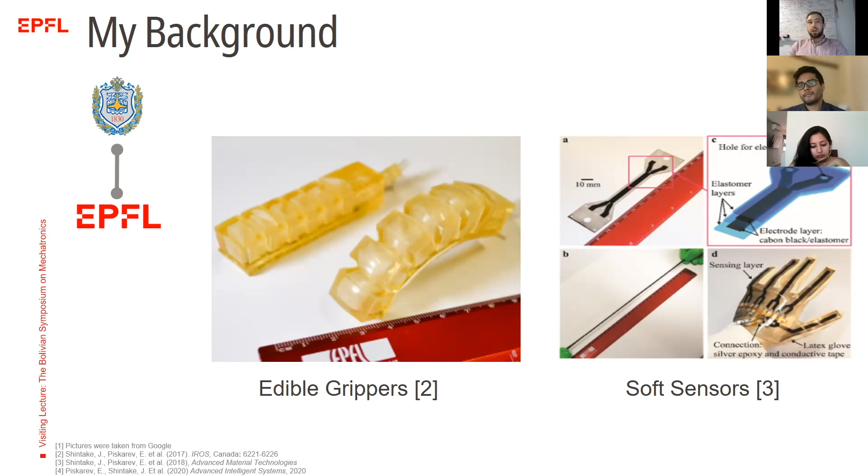Then I finished my 4 semesters at EPFL, and as a final part I went to the US, to NC State, located in North Carolina, in the city called Raleigh. Raleigh is the capital of North Carolina - probably people are more familiar with the other city called Charlotte because it's just larger. Also, if you guys are keeping track of the NBA, the Charlotte Hornets are from that city. However, in Raleigh we also have an NHL team, the Carolina Hurricanes, that performed not too bad the last 2 seasons. It's also a beautiful, magnificent city.

That's actually how the campus there looks. We've got an unbelievably great library there too - it looks super fancy, super nice, calm, a large campus. There at NC State, I was working with Michael Dickey in the Department of Chemical and Biomolecular Engineering. That seems, at least from the name, absolutely far from robotics and from my background in mobile robotics and mechanical engineering. However, guys, I'd tell you it's not that far, actually. Michael is just a brilliant scientist - he's been identified as one of the most influential researchers in the world this year.

That means he's in the top 0.1% in research fields right now, in 2021. Talented, but what's more important is that he's an extremely nice person to communicate with, to work with, to spend time with. There I've been working on variable stiffness actuators using liquid metal. Why liquid metal? That's of course because of the focus of the Dickey group - Michael works a lot with liquid metals. His ultimate goal is, if you saw Terminator 2, there was a robot named T-1000, made out of liquid metal, and that's something Michael would like to build in the end of his path. Of course we're probably a little bit far from that right now, but that's a great ultimate goal, I'd say.

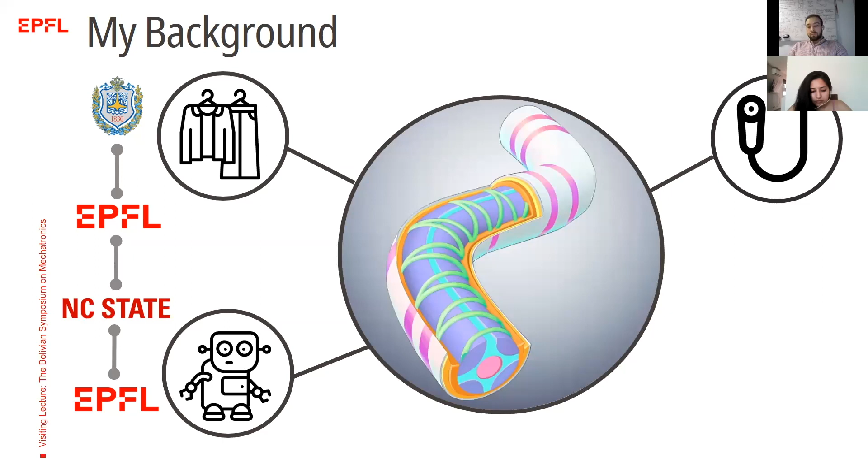It potentially can actuate, changing its state from rigid to soft and soft to rigid, and then could be woven into clothes, used with different robots, or also in medical purposes. That's kind of my ultimate goal. Ideally, I would love to develop such a versatile thread that could be easily applied in different domains to build some new capabilities. That's the vision I'm following right now.

Now I'd like to move on a little bit to what we are working on at LIS, because our lab is extremely diverse. We are working on a lot of different things. For example, we're working on soft robotics, aerial robotics, and machine learning. These are three main subdomains that we're focusing on right now.

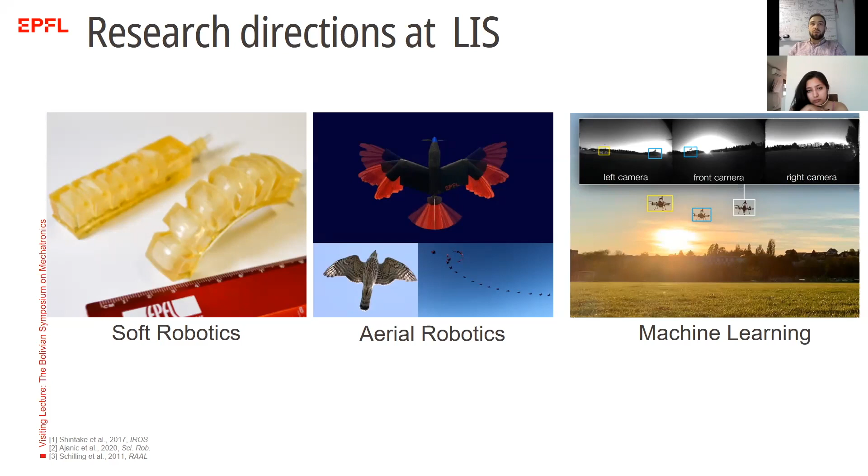In soft robotics, as I mentioned before, I'm working on smart filiform tubular structures that could potentially be applied, for example, in medical robotics. That's a paper you see on the left-hand side, from my very recent paper. It's not submitted yet, it's under revision, that's why I'm not able to show you my results. Hope to share these results with you guys next time. But that's just trying to give you an idea of what we're focusing on here.

Then the tensegrity structures you see in the middle part are composed of cables and rigid bars, as you see here. These structures are extremely lightweight and have a really great strength to weight ratio, because they're always under tension caused by the cables between the rigid bars. We can build quite a lot of different things at different scales and shapes out of these structures, starting from fuselages, the bodies of drones, as you see here, up to actually buildings.

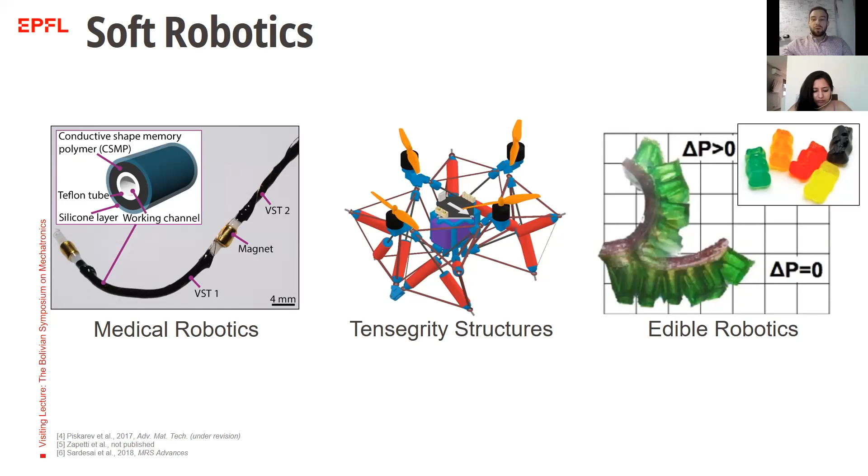And then what you see here on the right, that's a really fancy new field, absolutely new, called edible robotics. I will talk about it in more detail. It's an interdisciplinary research area where robotics meets food material science. These edible robots attract a lot of interest in recent years because they can be used for different interesting applications and purposes. For example, we can use them to deliver life-saving nutrition to people in emergencies or who got lost. We also put our milestone here with the soft pneumatic gelatin actuator, which was actually the first edible actuator.

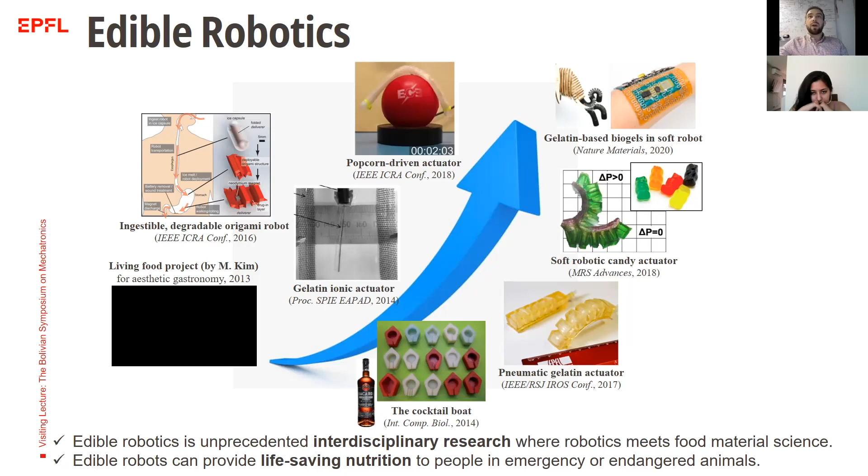For now, I would also like to focus a bit more on the application part. What we've been talking about before are more like technologies, or subfields. But what are the things we're actually building? What are the final devices?

So what you see here on the top left, that's an exoskeleton. You see the structure, how it actually looks like in this picture. What we can do with this exoskeleton is, by changing the posture of your body, control the position of the drone, and use it to control the drone during flight. This project is finished now.

Then what you see here at the bottom is a versatile soft gripper. That's an extremely interesting project, I'll talk about it more in a few slides. The researchers at LIS tried to develop a gripper that combines dielectric elastomer actuators together with electroadhesion, in order to grasp fragile objects, then highly deformable objects like these balloons made of silicone and filled with water, and also flat objects. For soft grippers, it's extremely challenging to be capable of lifting such a large variety of different objects. I'll tell you a bit more in detail how they achieved that.

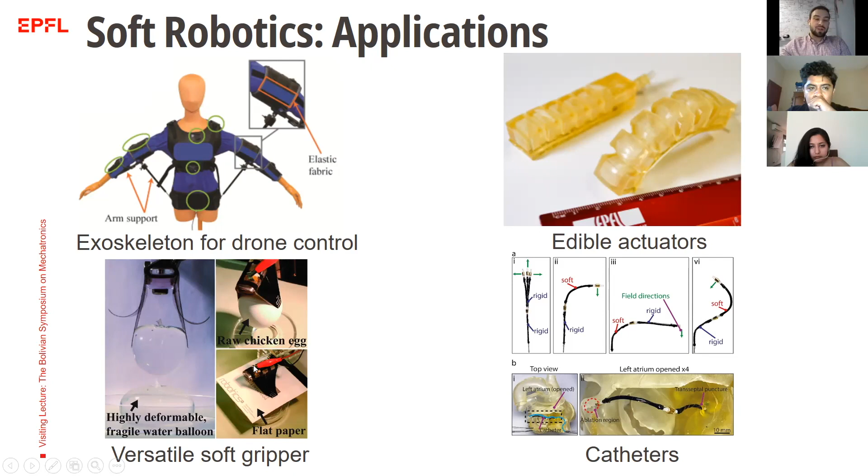So now I would like to focus a little bit more on this gripper, because that's an extremely interesting development in my opinion. What you see here is a gripper composed of two actuators, on the right and on the left, that is capable of lifting deformable objects, fragile objects like this raw chicken egg, and flat objects like this sheet of paper.

What is the structure behind it? It's a layer by layer structure where we have two passive layers made out of silicone with a thickness of 100 micron. Inside we have two electrode layers made out of conductive silicone. Usually to make silicone conductive, we mix conductive particles with the silicone, then blade cast it onto the silicone layers, and these layers are cured onto each other.

Then there's a pre-stretch layer, a dielectric layer. So what you have in the end, in the middle, is a sandwich structure where you have two electrodes and the dielectric layer in between them. That's basically a capacitor.

When we apply high voltage to both compliant electrodes, these compliant electrodes try to squeeze the dielectric layer in between them due to the Maxwell pressure that occurs between them. Due to that, we're able to change the bending angle of the actuator from bending state to straight state.

Why can we do that? Because when we're squeezing this elastomeric layer between the electrodes, we're changing the height of this layer. But due to the fact that polymers are incompressible, meaning the volume is always the same, this polymer expands in these two dimensions, causing it to become straight afterward.

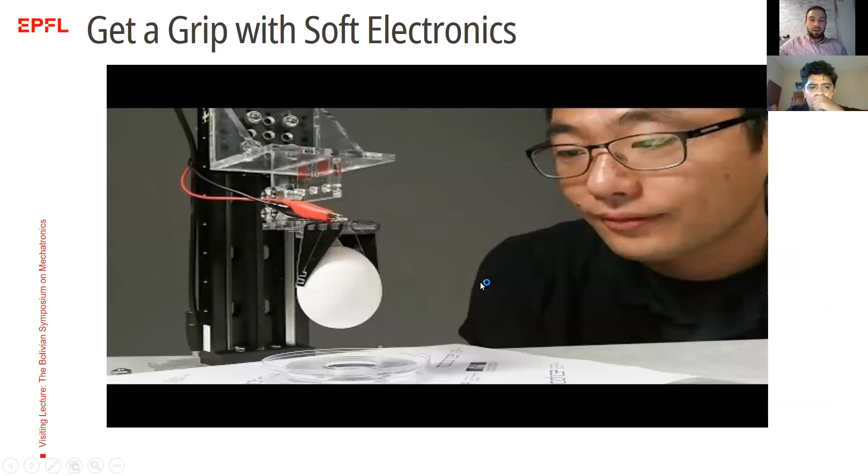And that's just a short video to give you an understanding of how this actuator, how this gripper composed of two actuators, works. We apply high voltage, and now we're able to lift this egg.

What is really interesting about these actuators is that they are extremely lightweight - the weight of them is just a few grams - and they are capable of lifting objects with a weight 1,000 times heavier than the weight of the gripper itself. These are actually Herbert Shea and Dario Floreano who developed this gripper.

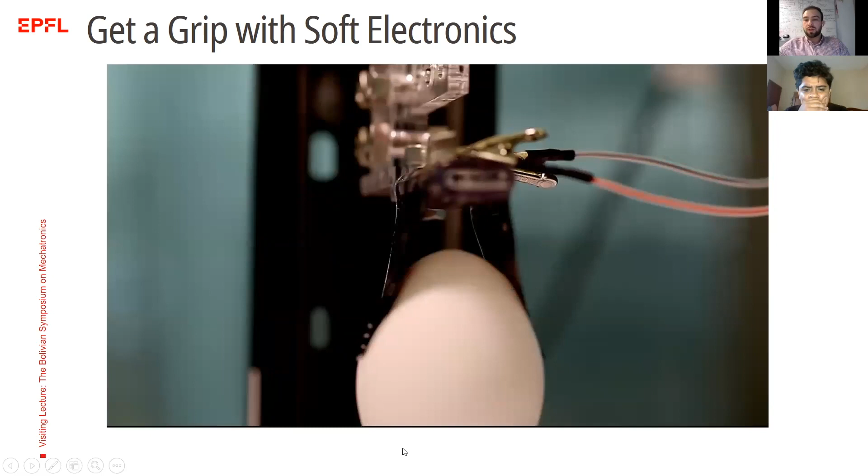Yeah, okay, let's move on. So that's about the first subfield in our lab. Then we're also working a lot on aerial robotics.

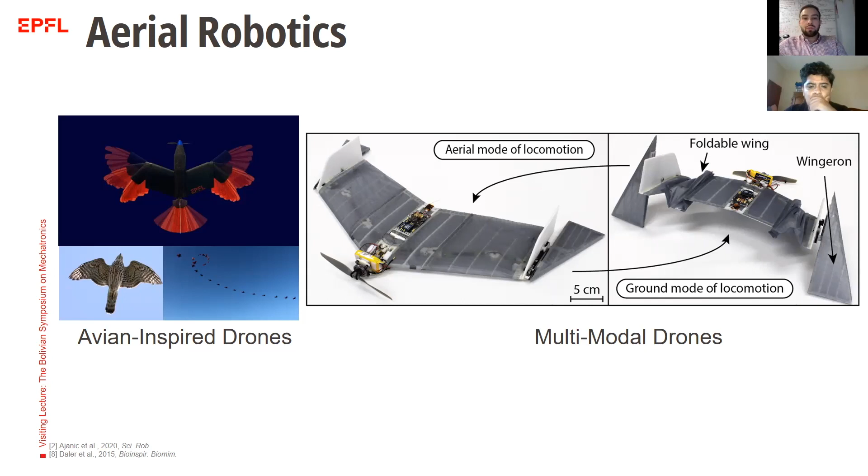In aerial robotics, we're mostly focusing on avian-inspired drones and multimodal drones. I will give you a little bit more project examples that we have here. We have this raptor-inspired drone that can move and actually change the area of its wings and the tail. I will talk about it a little bit more in detail on the next slide.

Then we're working a lot on aerial swarms in complex environments, this video that you see here on the left. We're actually working on different biologically inspired aerial swarms - birds and other animals show perfectly synchronized and coordinated flight. They can collectively migrate, for example, to a certain destination while staying cohesive and avoiding collisions.

What we want to reproduce is actually this type of collective behavior with flying drones. In this case, they would potentially be able to integrate into our environment safely. And if we would like to achieve it, of course the level of agility and obstacle avoidance are the fundamental skills that we would like to achieve in this research domain.

What you see here in the middle are delivery drones covered with a protective mesh. These drones are from a startup at EPFL, trying to attract investment. These drones can be used, for example, to deliver medical supplies or other payloads in cluttered environments.

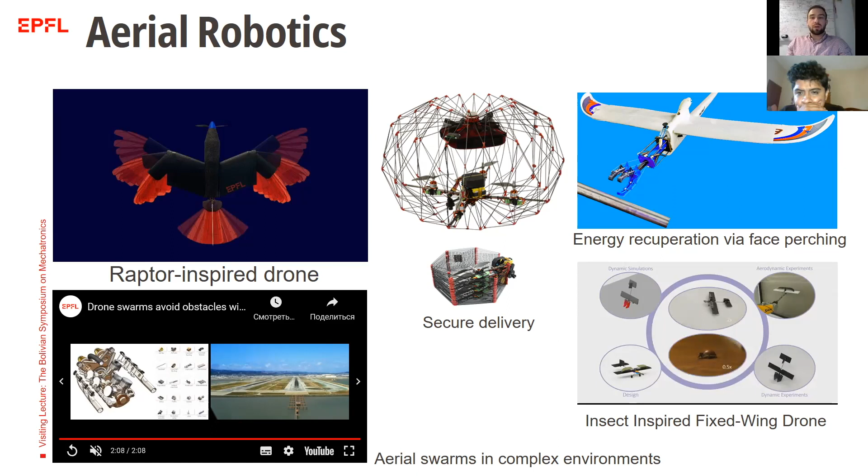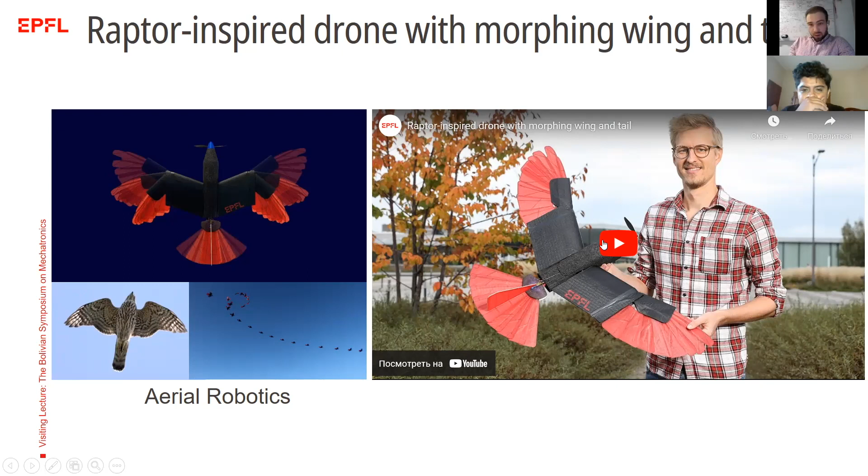I'd like to stop a bit more on this project because it's super exciting. It was published in Science Robotics last year, made by my friend Enrico.

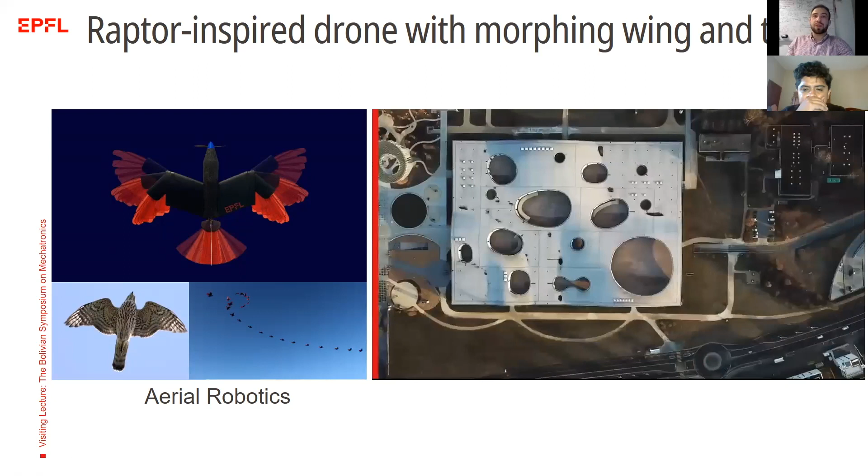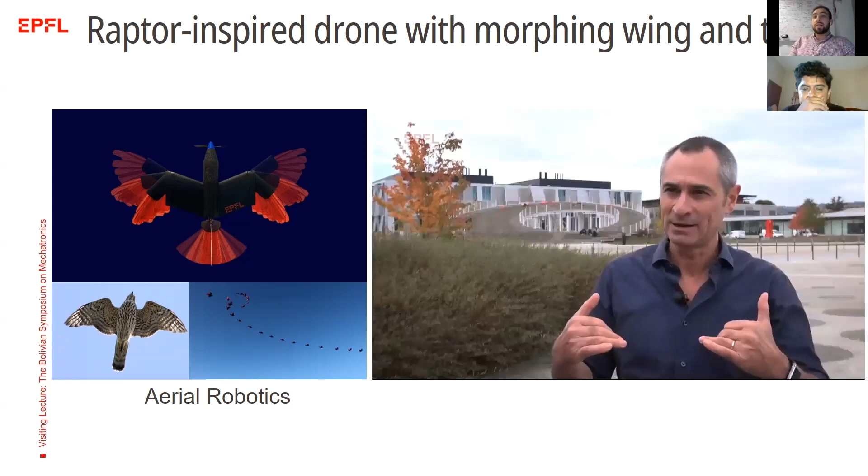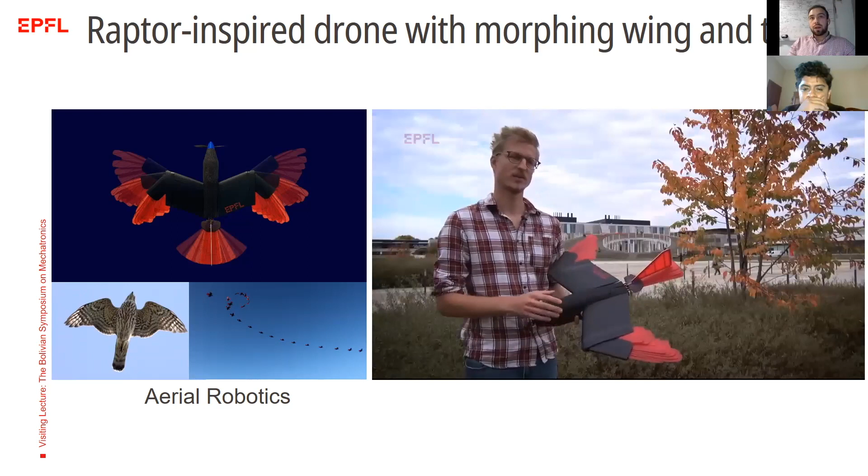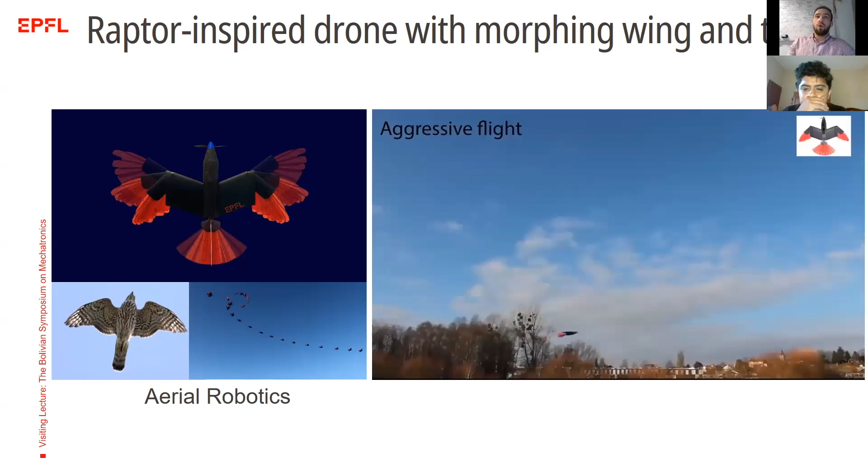The idea here is that birds are absolutely amazing creatures. If you look at birds, they can change the area of their wings in order to be efficient during gliding or flying long distances, while at the same time opening them up to be more agile and fly through buildings or cluttered environments. They do the same thing with their tail. That's actually what we've tried to do with this drone—by extending the wings and tail, we can change its aerodynamic performance and use it more effectively, whether during gliding or when doing something more aggressive between buildings.

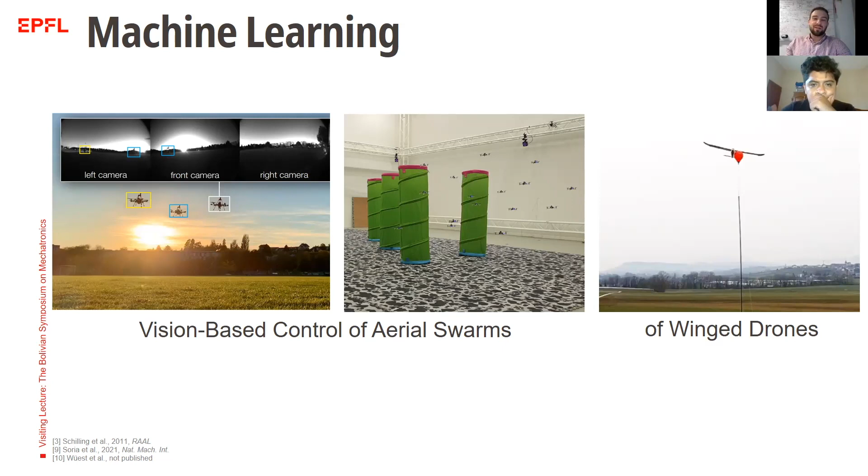The last part we're working on is machine learning. Mostly we're focusing on vision-based control, either of aerial swarms or winged drones. I personally don't know much about it since it's not my area of expertise—I just wanted to give you an idea that we have these projects. If you're interested, take a look at the paper I've referenced here, and feel free to contact the authors, who would be happy to discuss it.

Okay, so that was the last part—I've finished it. Now we're moving to soft robotics.

In this part I'd like to talk about a few things. First, soft robotics in general—why this concept is interesting and what we mean by it. Then a really good question for anything we work on as researchers: who actually cares about soft robotics, and who can be potentially interested in the devices we're developing now or in the future. Finally, I'd like to give you a few examples of where we are right now, based on my previous research.

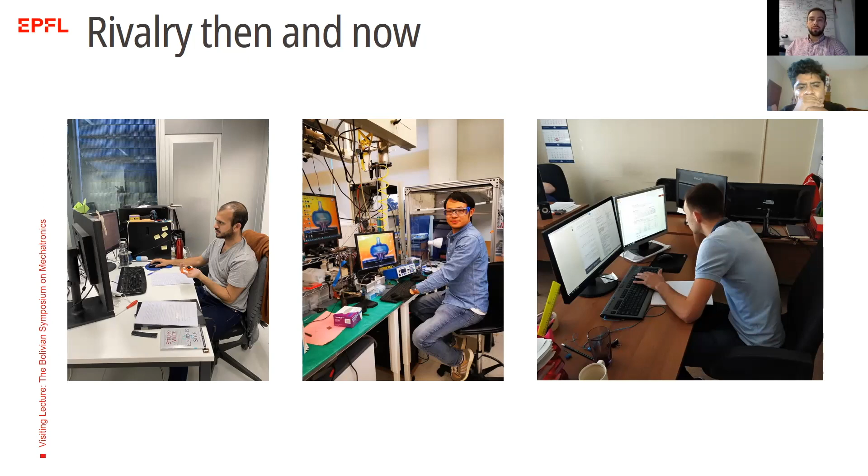Is it a competition now? Of course, that's for jobs. And what we see now is that there is always this trade, this dilemma between the high and low paid labor. But as you see, it's also changing through time.

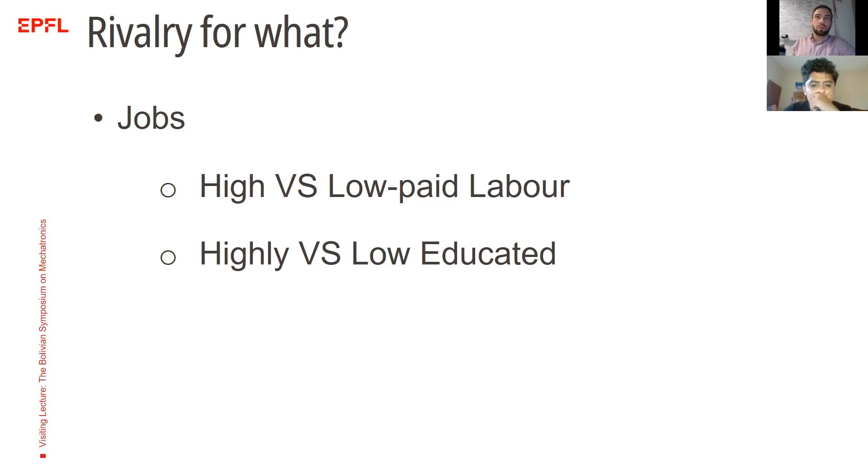For example, Chinese employees now become more expensive, and Europeans are less expensive than before. Highly and low educated people, as you see now, you all can get a really good education just by moving to different countries, and get the same education level as people in, for example, Europe or US. So that's also something that's slightly changing.

But what is more interesting in the future would be the behavior between people and robots. How would we work with them, collaborate with them? Would it be more the behavior of people with or without robots? Would robots work independently of us, or would there be some processes when we collaborate with them?

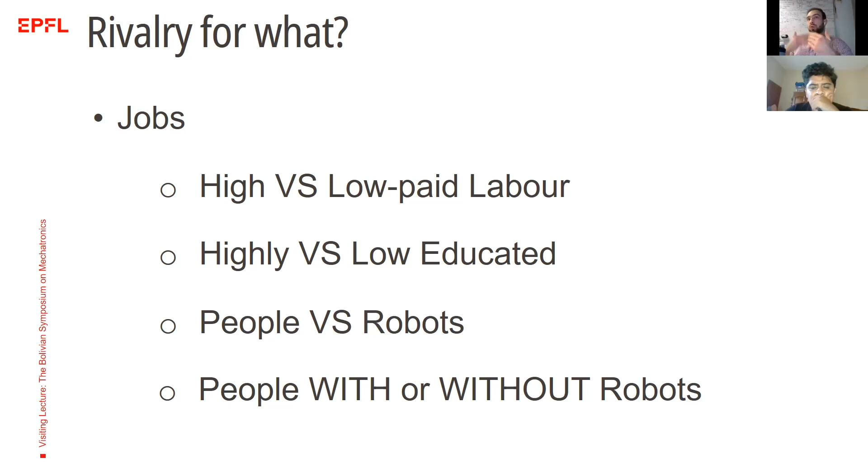Some obvious facts: the number of people is growing every year. The middle class in developed countries is beginning to disappear. Different positions like clerks, secretaries, production workers, all these jobs are disappearing now. Only the positions requiring high skills or low paid work remain, because robots come to replace them.

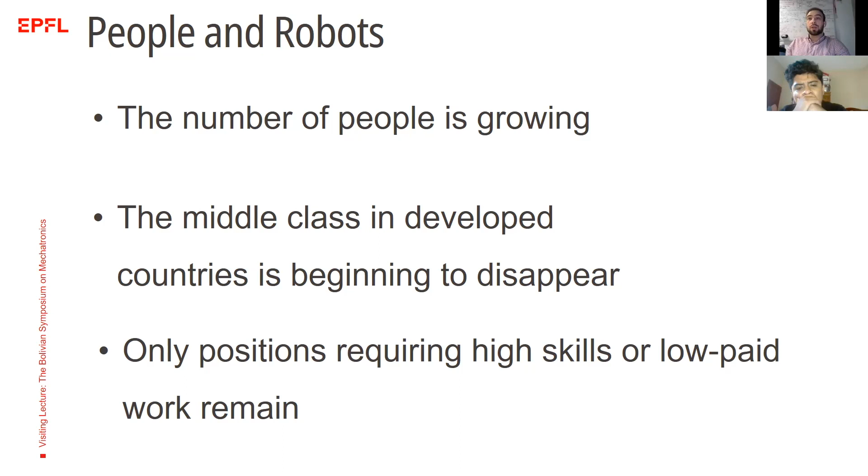And as you know, robots are replacing us in different segments. For example, as you see here on the right side, it's a factory, and these are the manipulators that are doing soldering of the cars instead of workers. And that's great because they can do it quite precise and fast, probably faster than humans.

But what I would like you guys to take a look at is this old video from Boston Dynamics. Boston Dynamics is an absolutely amazing company. These guys are pioneers in robotics across the globe. They're doing absolutely brilliant stuff.

What you see here, that's a robot that's just throwing away stones, building structures, building blocks, and I would say that's absolutely great that we already can build a robot that can do this. But let's imagine that some of us is standing there, on this spot. Would this robot determine that we are there, and that it would be better to probably not shoot this block right now into us? This old version would definitely not be capable of detecting us there, because there's just no sensors in this system that could detect it. And that's why we call these types of robots non-cooperative robots.

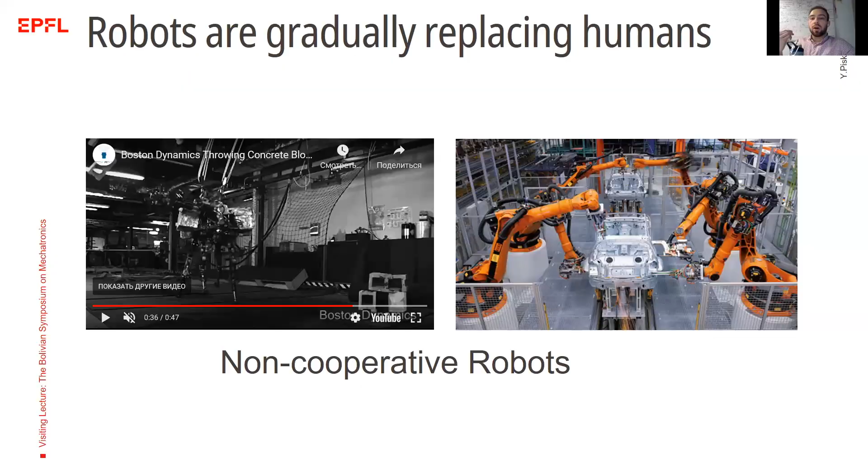And then just put these boundaries on all the sides. So what I want to say to you guys is that these robots are non-cooperative because they're not that good at working with people together. Not only because they don't have sensors to detect them, but also because their nature is a rigid body. I don't know, can you see my slide now?

No, I don't know what happened, but we cannot see your screen. Yeah, let me show you. Will you restart your... okay. Could you see it now? Yeah, now yes, okay awesome. Sure, okay let me continue.

So that's the first point - these guys are just not well equipped in terms of sensors to detect us. But the second part, a fundamental problem, is something inside their nature - they're made out of rigid components. So if I would try to go through one of these manipulators, it would hurt me just because it's rigid. And if I would have the same kind of impact with a human, it wouldn't hurt that much because we as humans are much softer than these manipulators.

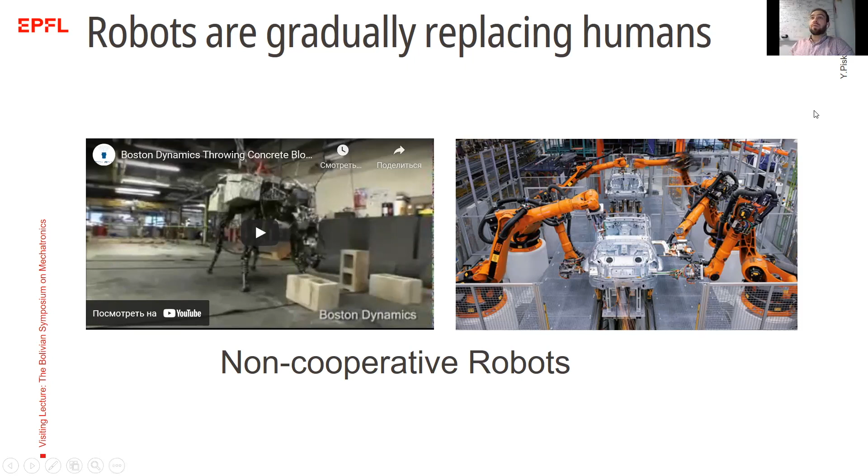Just to give you an idea what is the perfect cooperative robot in my opinion - have you seen it? I think there's a movie called Big Hero Six, something like that. This guy, his name is Baymax, and as you see, he is absolutely soft. So it's actually the ultimate goal of soft robotics to be able to develop such a type of robot.

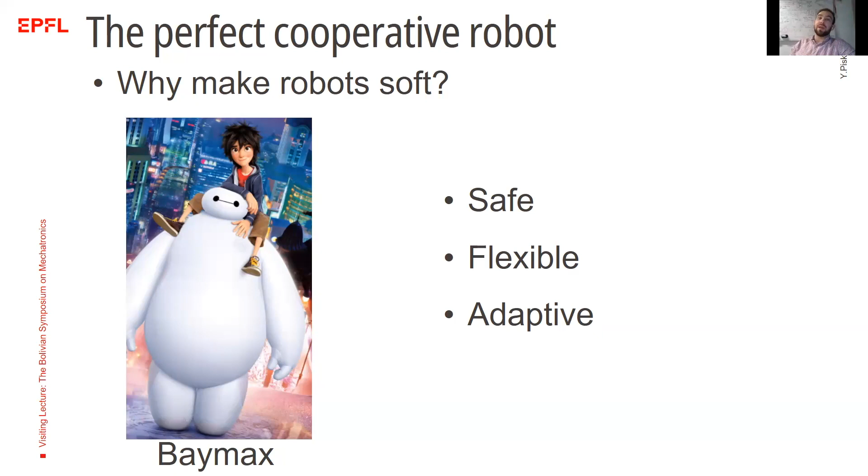The reasons why we make these robots soft - in my opinion there are a few different reasons. First of all, these robots are much more safe. If we would just knock into them for some reason, we would probably not even feel it. They are also flexible, and I'll show you in a few slides that this flexibility can lead to more adaptive behaviors. For example, if a robot is rigid, you're probably not able to put it in your office. But if the robot is soft, you can push it a little bit, decrease its volume, and it will stay in place. It's just a rough example for you guys.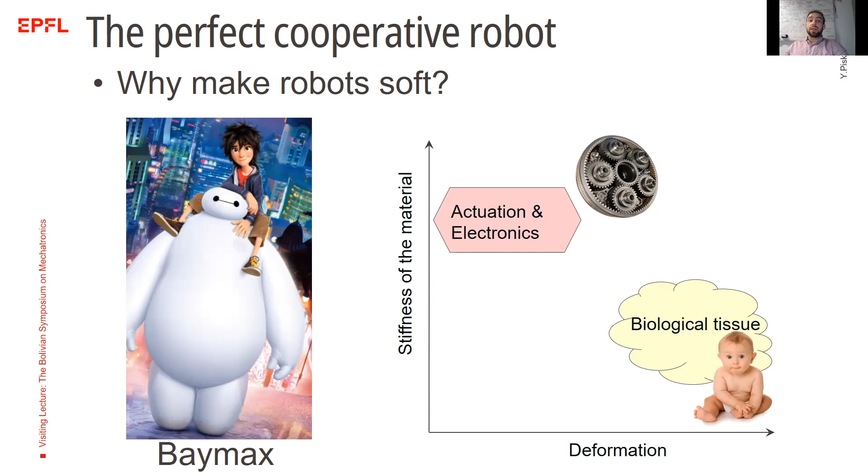But the problem is that what we would like to do is go further on this chart of deformation and stiffness of material, moving more to the right, closer to biological tissue, closer to the mechanical properties of the human body. But all the actuators, electronics, batteries, and quite a lot of sensors now are made out of stiff materials. That's something we'd like to overcome in soft robotics by developing soft sensors, soft actuators, and skeletons, in order to build more advanced robots like Baymax out of these components.

Carmel Majidi, a brilliant professor from Carnegie Mellon University, formed the idea of mechanical impedance mismatch. What does it mean? What you see here are different materials and their mechanical properties in pascals. The principle he built is that to preserve the natural mechanics of the human body, wearable and implantable technologies must match the elastic compliance of natural skin, tissue, and organs. Meaning that if you would like to build something as a wearable device, for example on your hand, as you see with this smart glove, the mechanical characteristics of the material you use, in order to not feel these objects on your skin, should be in the same range as the mechanical properties of human tissue.

And what you see here, we as humans are somewhere around 10 to the 5, 10 to the 6 - that's where our skin is actually. And ideally for this purpose, that's the reason why in soft robotics we're widely using soft silicone elastomers like EcoFlex 0030, Dragon Skin, or something a little bit harder like PDMS, Sylgard 184, Sylgard 186.

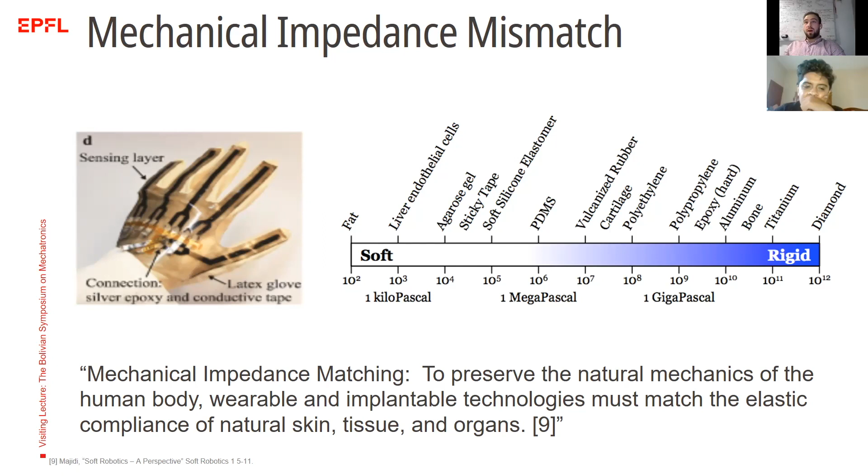Now I would like to say a few words about the inspiration - where does it come from? That's actually a story told by Professor George Whitesides at Harvard, if I can briefly tell it to you. Once, I think the US Army passed by him and said, look, we would like to have some kind of recognizable thing that looks like a can of Coca-Cola, but that can, on command, disassemble, do some army job, for example surveillance - to spy on somebody, move somewhere, spy, and then assemble back and look like the Coca-Cola can. So I would say that the application itself, a spying robot, quite often isn't that interesting for academia.

However, the idea, the principle that you have a reconfigurable structure that can assemble and disassemble on command and do some things is absolutely extremely interesting. But in order to build it, first you need to always have a model, something that probably you would see or find in nature.

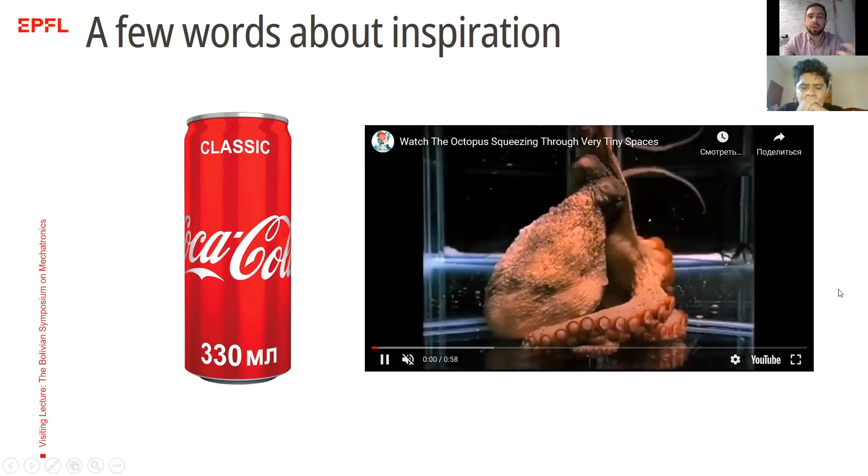And Professor Whitesides found this model that is actually the Octopus. What is really great about Octopus, as you would see from this video, is that it's able to sneak through holes that have only 10% of its own size. And that's absolutely great about octopuses.

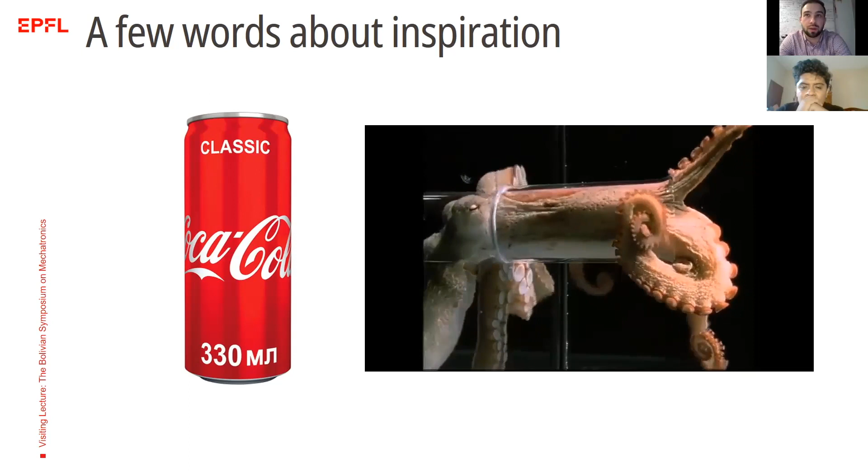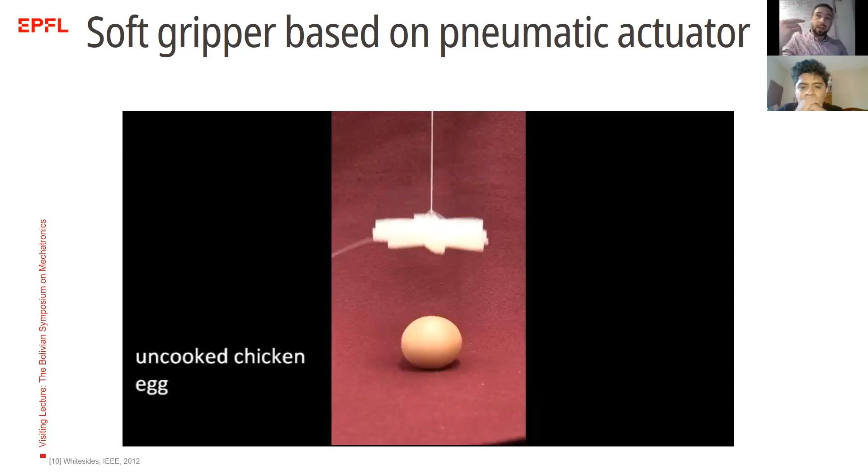In the end, what the Whitesides group did, they published this paper on a soft gripper based on a pneumatic actuator. First, I would show you the working principle, then show you the video of what we can do with this gripper and how it looks, and then we'll discuss the working principle, which is absolutely simple.

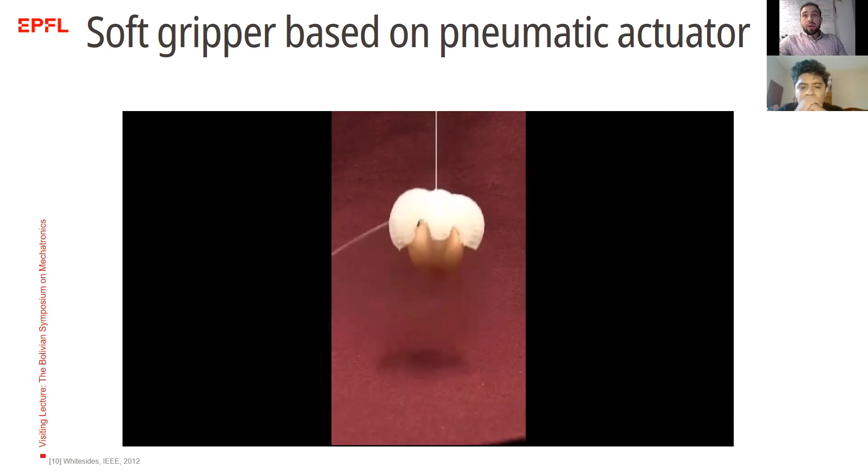Yeah, so as you see here, by applying pressure or inflating air into the soft chambers, we can bend this gripper and grasp a fragile object like this egg.

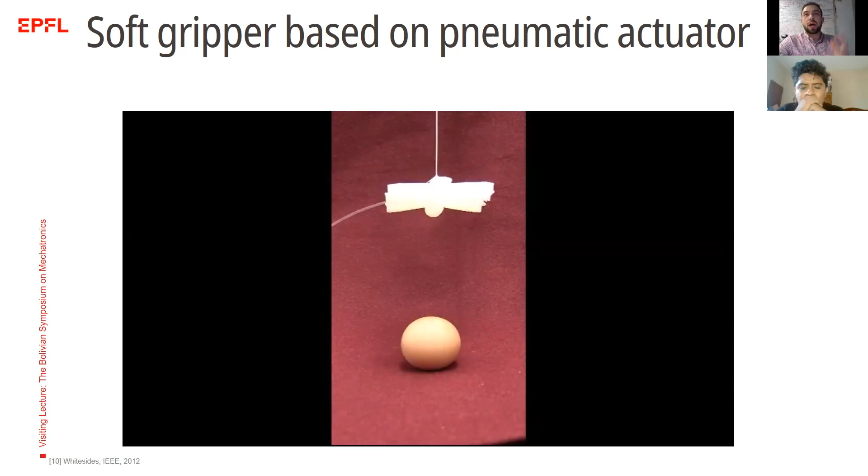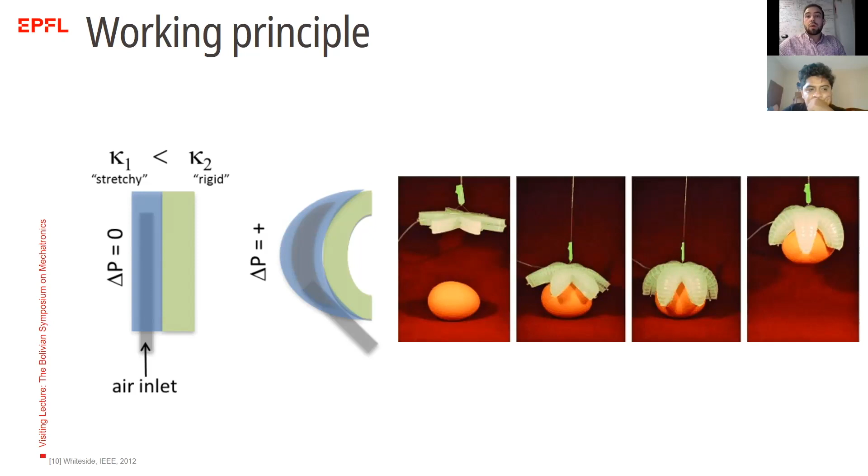So now how to actually build it? That's relatively simple. First, we need to 3D print, for example, or laser cut a few molds. These are molds for the upper part and the bottom part. The upper part is this blue region here, and the bottom part is this green region.

Then we just pour silicone into this mold. Of course, before that, usually when we buy silicone, it comes in two different bottles. One is the silicone, the second is the cross-linker. Then we mix them together in the planetary mixer. After that, we degas all the air out of the silicone, and then we pour it into the mold.

What you see here is just a layer of silicone that we built together with an inextensible layer. This red dashed line here is actually the green one that you see here, exactly the same. After that, we just stick them together with Silpoxy, which is a silicone glue, and then we put it in an oven. That's how we get this actuator from the fabrication point of view. Relatively simple.

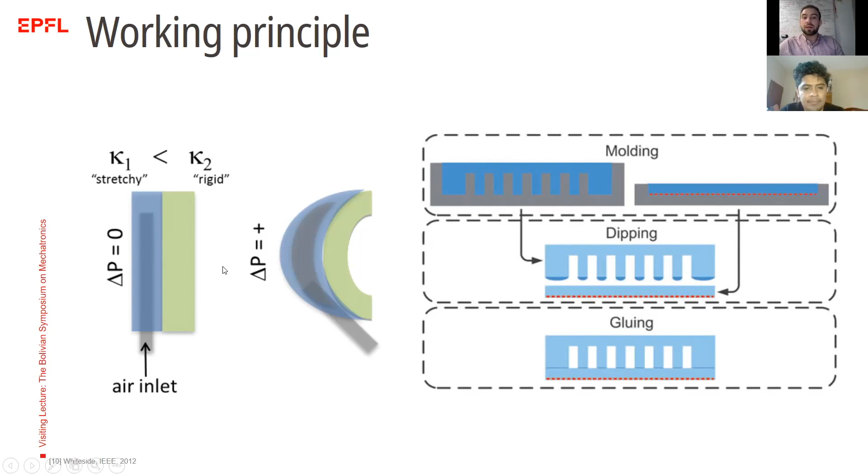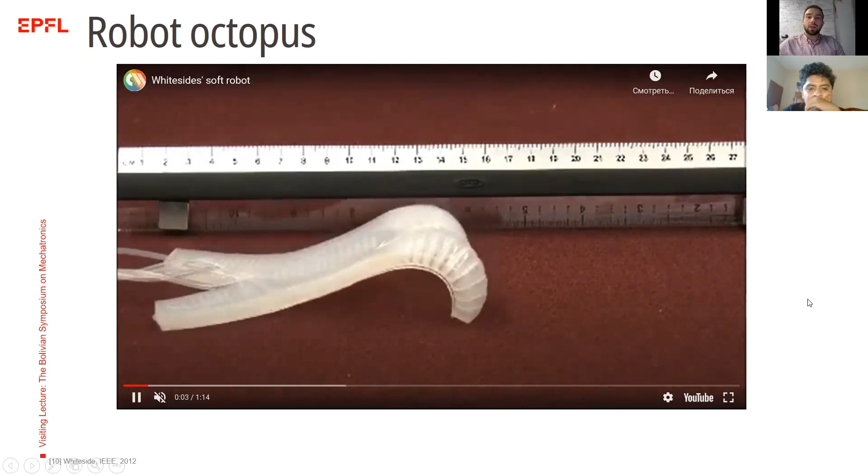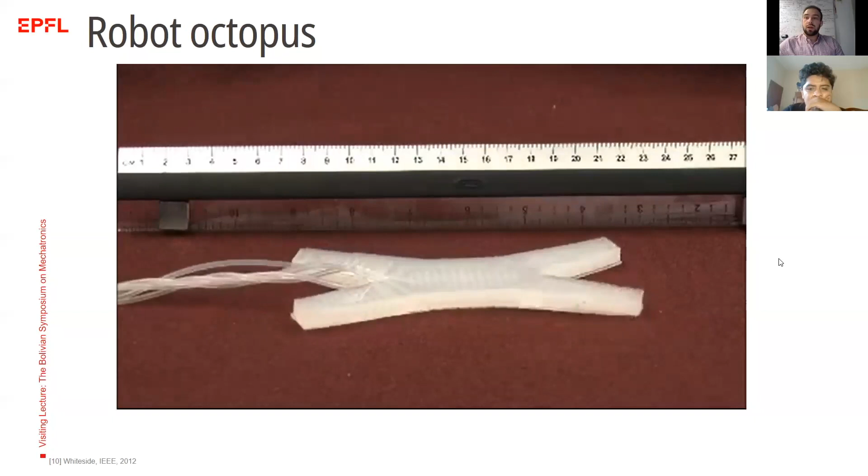So after that, they went a little further and made this crawling robot composed of 5 different chambers that could be inflated or deflated independently on command. Out of that, we can generate some kind of crawling motion, as you see here. So this is an example of bio-inspired robotics inspired by octopus.

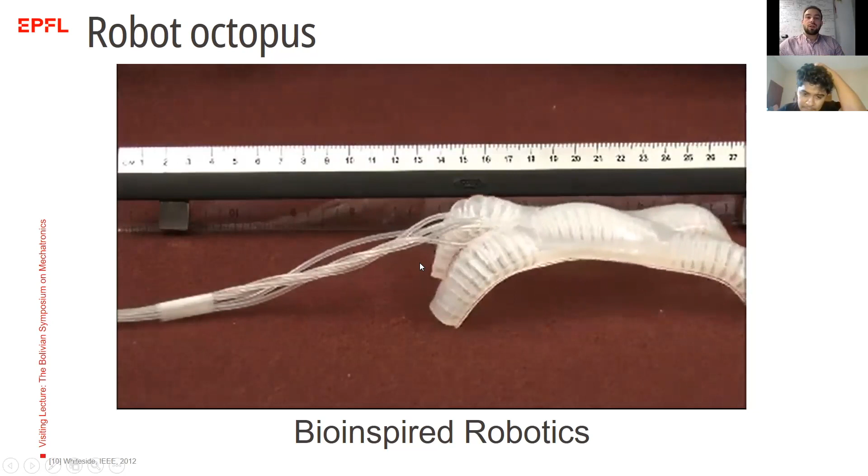And as you see here, this is a quite old video, like 10 years old. Just to give you an idea where we are right now, 10 years after, please take a look at this video. It's interesting to compare them together, because this is also a bio-inspired robot inspired by the tentacles of octopuses.

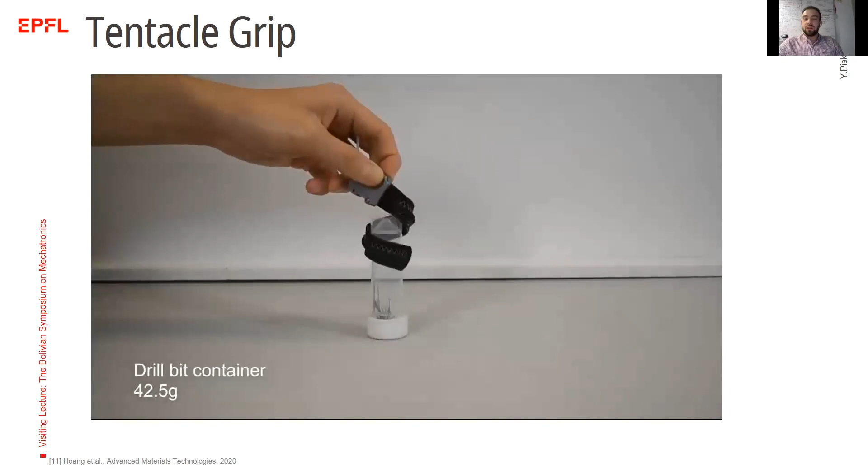And as you see here, that's also a gripper. What we can do here, also with pneumatic actuation, is grasp different objects like a drill bit container, for example. But this actuator is much more complicated, and you will see it in a sec.

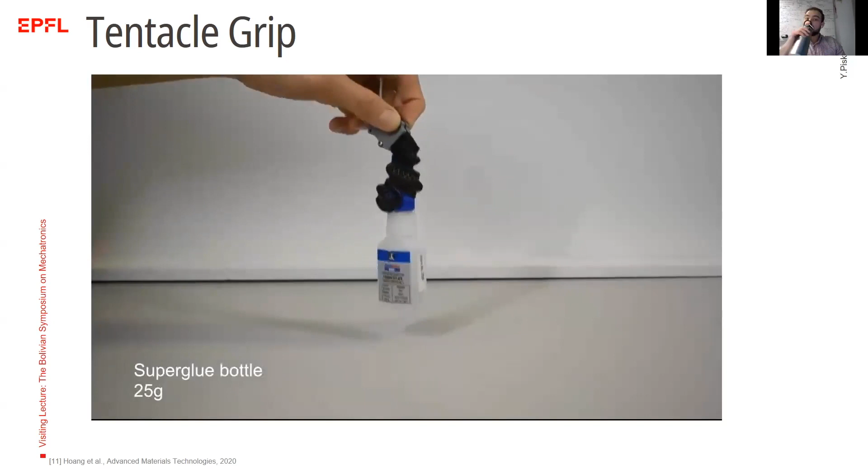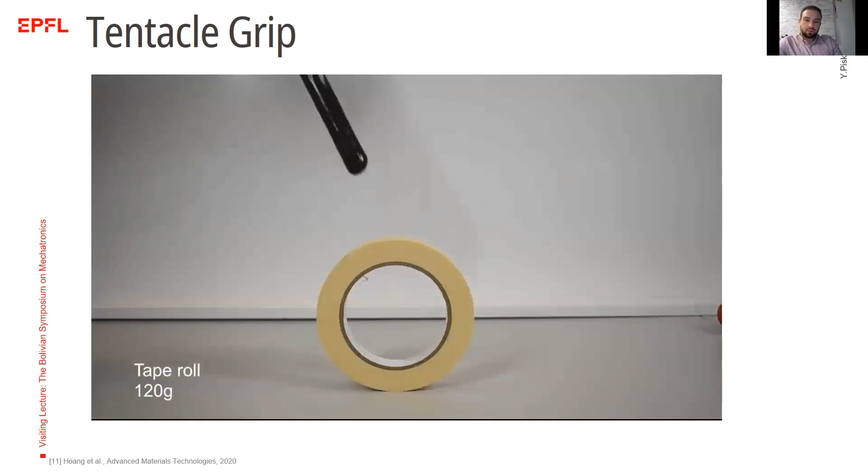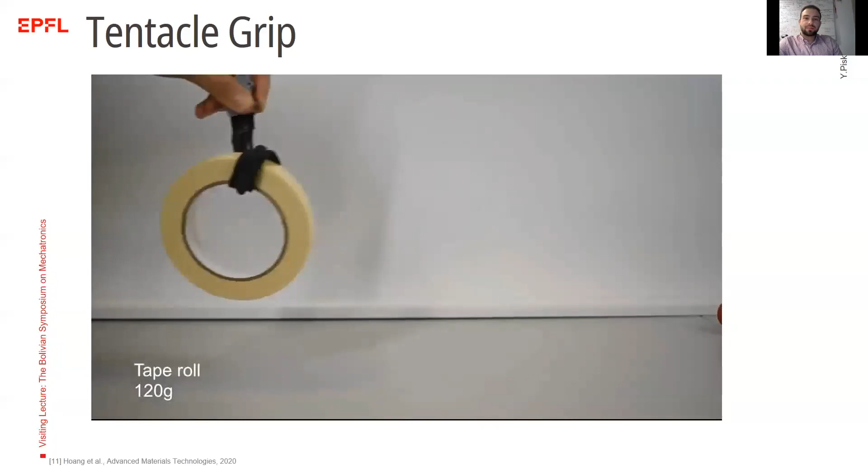So you see the weight of this object is already 120 grams. Yeah, the hammer is 300 grams. I will just move on to the most interesting part.

What does it mean? Inside this gripper is not just a gripper that is able to bend. This gripper can also change its state, as well as, for example, our muscles. Let's imagine that you guys are trying to lift this pen, right? Probably your muscles would be still quite soft.

However, if you would try to lift an extremely heavy bag from the shop, your muscles would become stiff as a rock. Of course, if you're doing enough sports and going to the gym. But anyway, you would see the stiffness change of your muscles. They would become more rigid, right?

And that's exactly the same capability that was implemented here in this actuator. Inside this actuator, there is a layer that has a variable stiffness capability. It can be, for example, shape memory polymer, or thermoplastic polymer, or liquid metal that at room temperature is rigid. However, if we heat it up a little bit, it would become much more soft, meaning that the Young's modulus would change significantly under different temperatures.

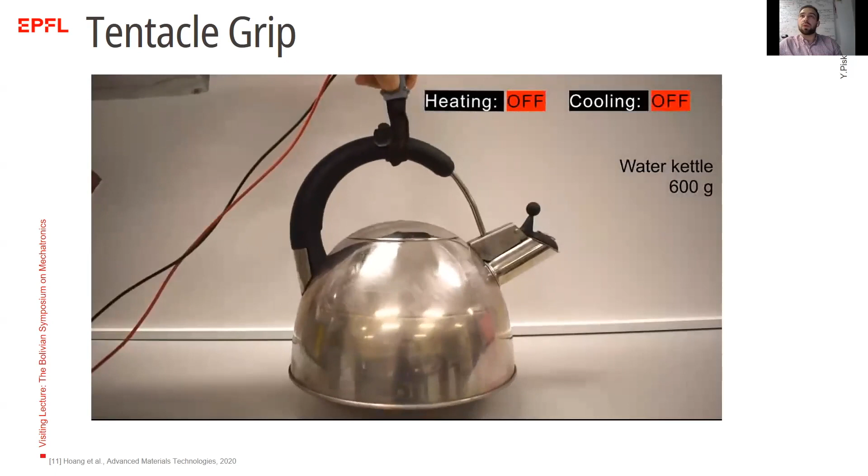That could be even orders of magnitude if it's liquid metal. In case of shape memory polymers, probably 10 times, 20 times. And now we're able to lift this very heavy object due to this capability.

So now a little bit about how it looks like inside. What you have inside is a core actuator that's a pneumatic actuating system. Then we have this variable stiffness layer, this variable stiffness filiform tube made out of polymer, and inside it there is a copper wire. So we just apply heat, we just plug this copper wire to the power supply.

We heat it up with a certain power, and due to indirect Joule heating, this copper wire is going to heat the variable stiffness material, shape memory material, or polymeric material that we have around. And then here we also have a soft contact sensor layer made out of liquid metal, but I'm not going to stop on it. If you would like to read this paper, it's absolutely brilliant, go for it.

So yeah, I just finished a little bit with the soft robotics overview, what we're working on there. So now I would like to give you the idea of some of my activities that I did during my master's. What my goal here in this part would be is to try to show you the whole path that we took in one of the projects, how this project was developed at the start, how we usually start academic projects.

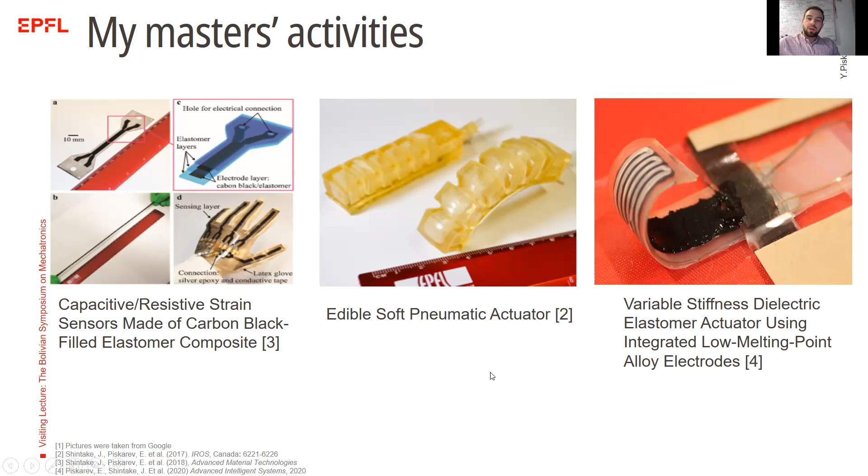Yeah, no worries. So first of all, I would start with the project on edible soft pneumatic actuators, and I would like to start with the thing that we usually do right at the start of any research, because any good research usually begins with a good question. We call this a research question, and I will just give you an example.

What was the kind of discussion line here in this project. First of all, I think all of you guys would agree with me that we are usually building robots based on live organisms, right? And what we're usually doing is taking the function of the live organism, like for example a cow.

For example, if you would like to use animals like a cow or a bull to help you in your farm, to clean or move something, you can use this cow as a kind of machine. And actually what we're doing is building machines, literally automobiles, cars, to do the same for us, or like horses, which we use to go from one destination to another. We build cars, but we moved the functionality of the horses to the cars, and they do the same job, but much better than animals.

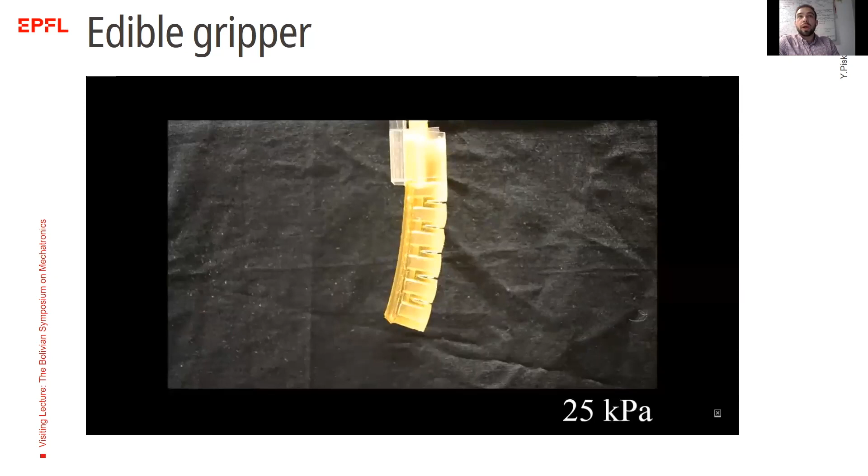So we built this actuator, presented in 2017 at IROS in Canada. It's a soft pneumatic actuator - you already saw them today. Here we're applying different pressure in order to bend it as much as we can. That's what you see here.

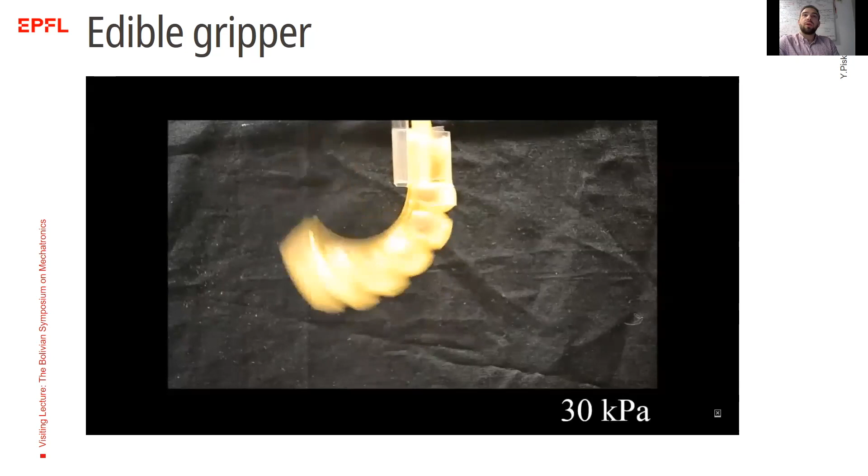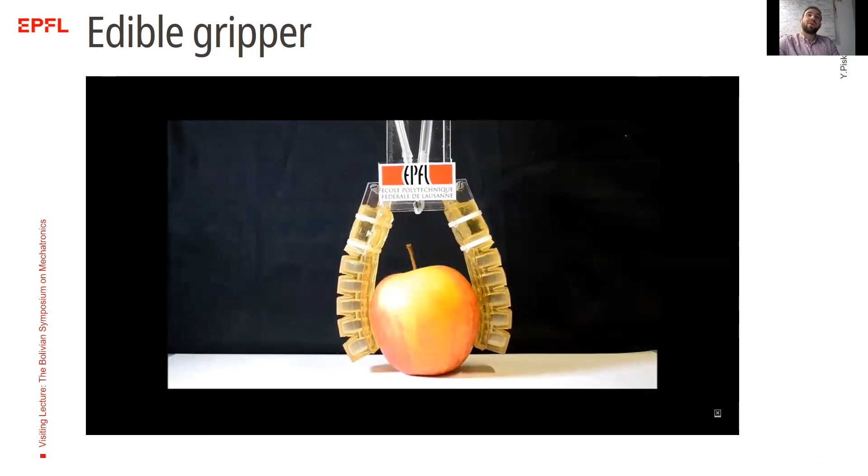That's just one actuator. But then what we can do is take two of these actuators that can bend, and use them as a gripper to grasp different objects, as you see here with an apple. We can grasp different objects, not only the apple, but also Lego, mandarins, eggs, different things.

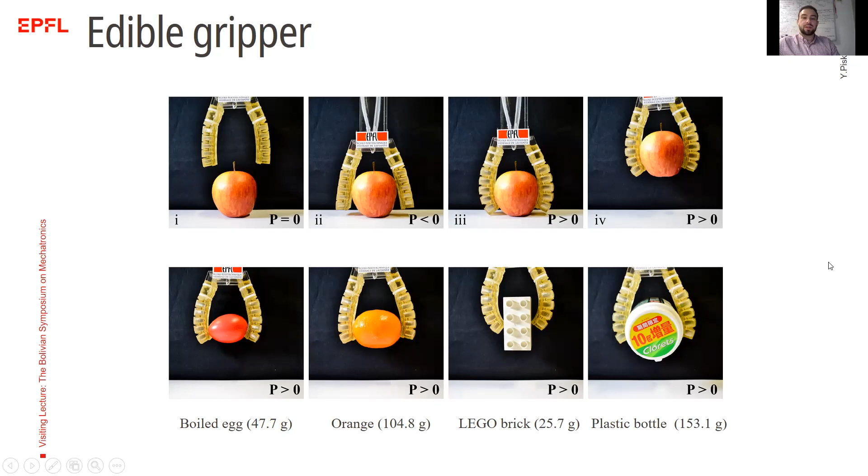Here, what was the challenge for me - this part can be more interesting to master's or bachelor's students. That's the moment when I came to the lab. My advisor just had an idea of what to do, but the material itself was not well developed. The challenge he faced was that we would like to build a material with mechanical properties the same as silicones, but that can be edible.

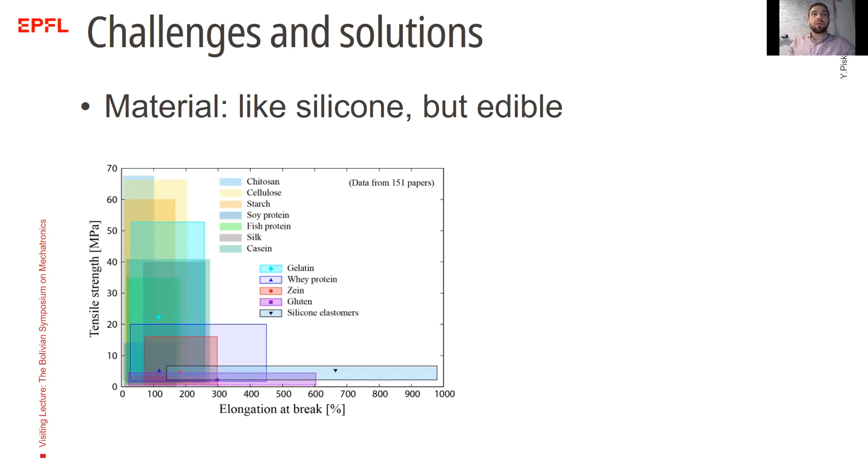He did great research on different components that can be used as the core part of the material and also as a plasticizer. He collected data from quite a lot of papers, and out of that, we decided to develop this material based on gelatin as the main material, and glycerol as a plasticizer. That was my part of the work back in 2017.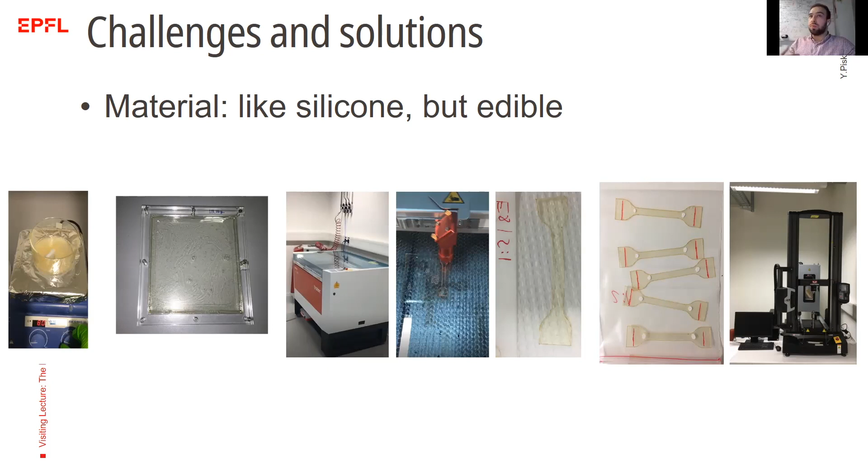What I did the whole semester was mixing the material in different proportions and ratios of gelatin, glycerin, and water to get samples that look like a sheet of material, so I could laser cut them in a bone-like shape and then do tensile tests. By applying different hyperelastic material models, like the Neo-Hookean model or the Yeoh model, we can get the final stress-strain curve to compare the material we made with real silicone.

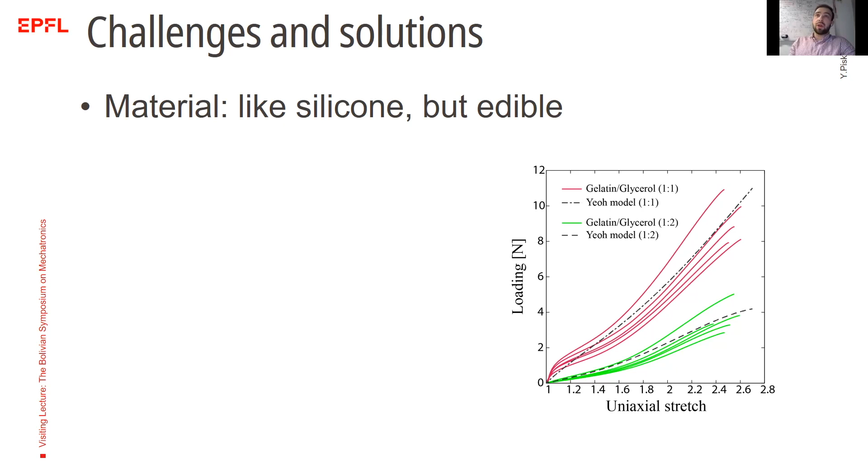And we succeeded - we built a material whose mechanical properties are really close to the commonly used silicone Ecoflex 00-30. Here I would like to share some insights of what I went through this semester project, first of all how to make an actuator.

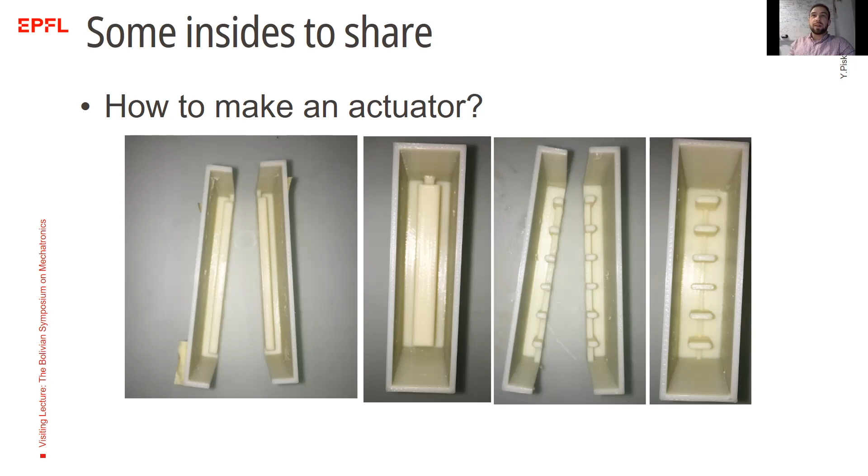That's exactly what you already saw. I just made different molds, and then I tried to pour my material inside, let the water evaporate so it would solidify, and then take it out. What I found out was absolutely weird to me - these are different designs of how they look, and on the right side you see how my design looked after the water evaporated.

For me, that was an absolutely non-understandable moment, because I just saw videos on YouTube of how people develop actuators made out of silicones, but there is nothing like that - the material doesn't shrink.

Just because that's silicone, right? There is no water, there's nothing to evaporate. But here, when you're developing the structure, you should also take into account this shrinkage of material.

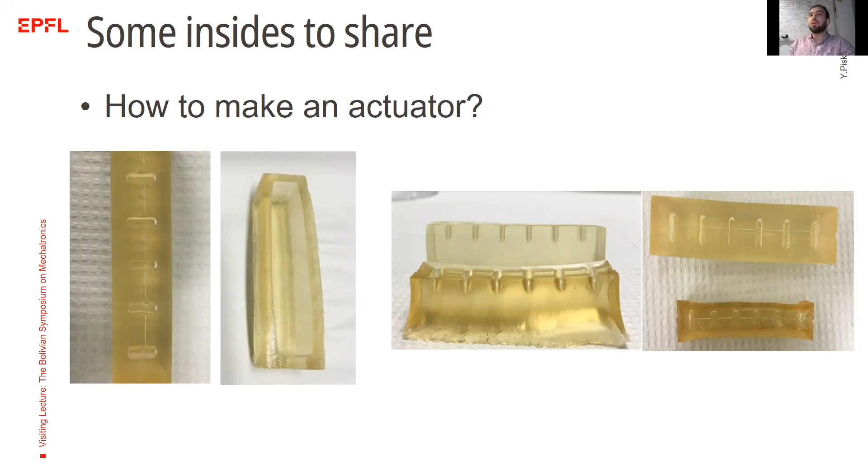And that was actually the inside. That was an important step that we didn't take into account at first. And then we had to design our molds in order to be able to forecast how the material would shrink. So then in the end, we made this first edible actuator and gripper.

And what is interesting, when it's already done, we're also looking at this device and we're trying to understand what are, let's say, the advantages of these materials. And advantages were extremely interesting, actually. First of all, this material is biodegradable, right?

Compared to silicone, silicone is not a biodegradable material, meaning that if, for example, for some purpose, we're going to use it in nature, we can just throw it away and it would just degrade there. Or if you would like to build a robot, let's say a caterpillar-like robot that can just crawl inside our body and put, for example, some kind of pill or medicine into a certain local point in our stomach and then degrade there, it's possible.

And what is also very interesting is that this material has self-healing capabilities, meaning that you can warm it up. If there is a hole, you can warm it up and then this material would self-heal itself. With silicone, that's absolutely impossible, actually, because silicone is thermoset, not a thermoplastic.

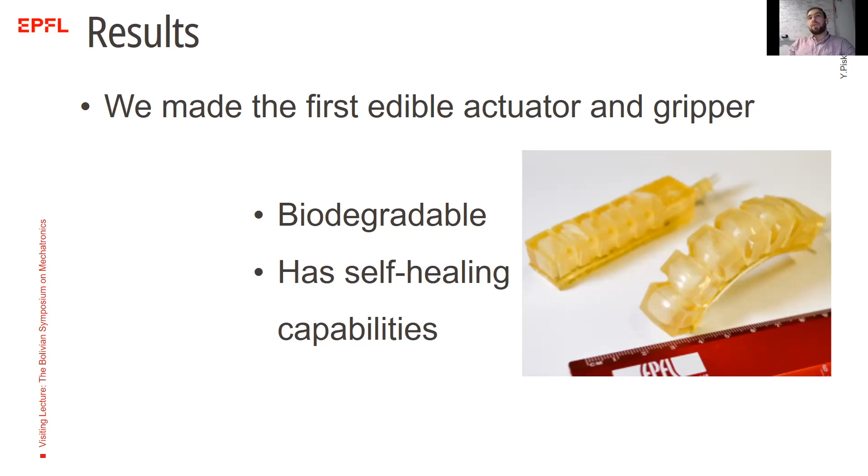And when we showed the results of this project, that's actually the moment when the industry partners got interested in what we did. But it was not absolutely because of the research question that we asked, which was: would it be possible or not to develop this first edible actuator?

They don't care about that, but they do care that it's, for example, self-healing. And if they use this material for any purpose and there is a hole or it's damaged, they can repair it. They don't need to fabricate a new one, so that they can save money out of it. Or that it's biodegradable, meaning that it's more eco-friendly.

And you know the trend in the world now is that we're going more for sustainable solutions to decrease our environmental footprint, right? So yeah, that's kind of the moment when finally academia meets industry. That's right on this stage.

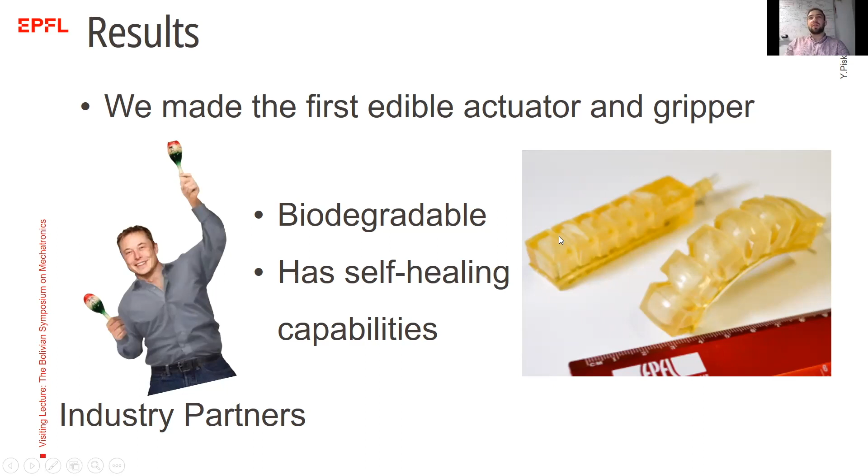So yeah, now probably I would let's say go also for a few more slides on another project that I was working on. So after that, when this project was done, I was also working on stretchable sensors, soft sensors.

And what is the motivation of it? That's actually what you see here on the left. It's an exosuit made by Harvard Biodesign Lab, led by Conor Walsh. The idea when you are building exoskeletons is that people are actually trying to decrease the weight of the skeleton as much as possible, right?

So all the components should have really low weight. And that's why they started building new sensors, for example, soft sensors that first have no mechanical impedance mismatch as you saw before with our skin, but are also extremely lightweight, right?

And we decided to go for capacitive sensing instead of resistance sensing, which was probably more popular at that moment, because the error is extremely low after multiple cycle tests, like 10,000 cycle tests. It also works at a larger range of temperature, because if the temperature is extremely high, the resistance can change and cause noise and problems with, for example, determination of difference between two states, right?

For example, the inextensible and elongated sensor. And also the sensors themselves are a little bit expensive - the components people were using are quite expensive. For example, liquid metal is a very, very expensive component, actually.

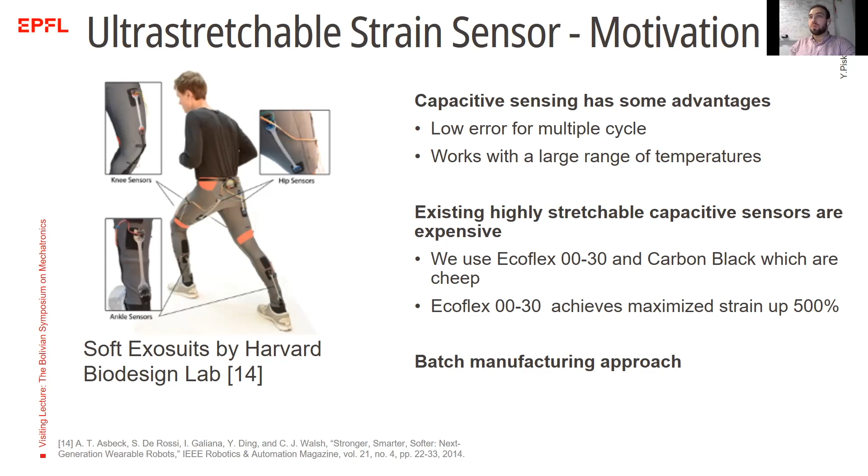So what we have here, we have a PDMS layer. Then on top of that layer, we just pour some liquid silicone, then we blade cast it, so we make a really thin layer out of it. Then we put it in an oven. That's how we form the first layer with a thickness around 100 microns.

Then after that, we put on top of it a layer of conductive silicone, and then we put it in an oven. The thickness of this layer is around 20 microns, so it's an extremely thin layer. After that, we go to the laser cutter and we actually etch the surface, so we remove some of the conductive silicone. Let me show you how it looks like.

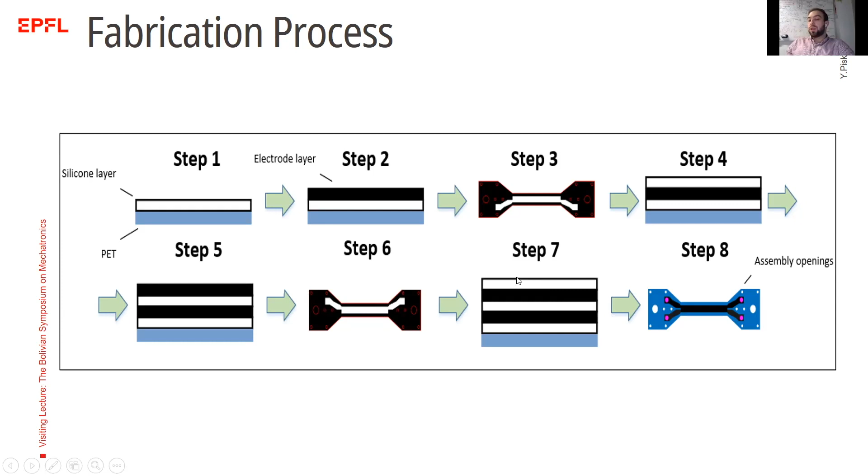So let me go back - that's actually what I showed you. Step 4 is equal to this picture here, right? You have 3 layers. After that, we put one more silicone layer and etch the electrode, but now on the other side. And then we encapsulate everything in silicone here. That's actually what you see here - that's a sensor that could be used to measure.

It is actually a sensor with 2 modes. We have a resistive mode, so by connecting to these 2 leads in the bottom and upper part, we can measure the resistance change. But by connecting to 2 leads on one side, we can measure the capacitance change when we're stretching this sensor.

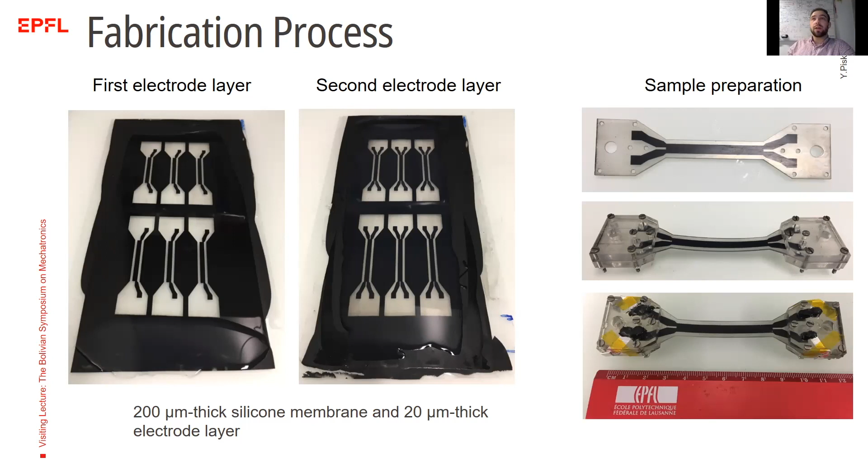That actually was my second semester project. So my second semester project when I was a master student was to first of all fabricate these sensors and then do the whole characterization in terms of different things. So what was my part here? I had to link together the laptop with an LCR meter, the device we use to measure resistance and capacitance change, together with the linear stage that you see here.

That's a linear stage, this long thing here that could go back and forth. And the sensor that you see here is mounted right on the linear stage. So out of that, we collected quite a lot of data. We collected data on the repeatability, and we took a look at how the capacitance is changing, how the resistance is changing under different strains.

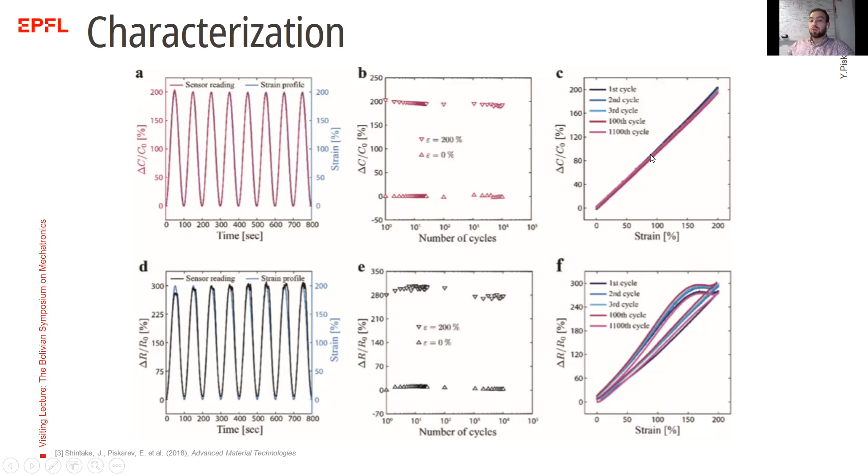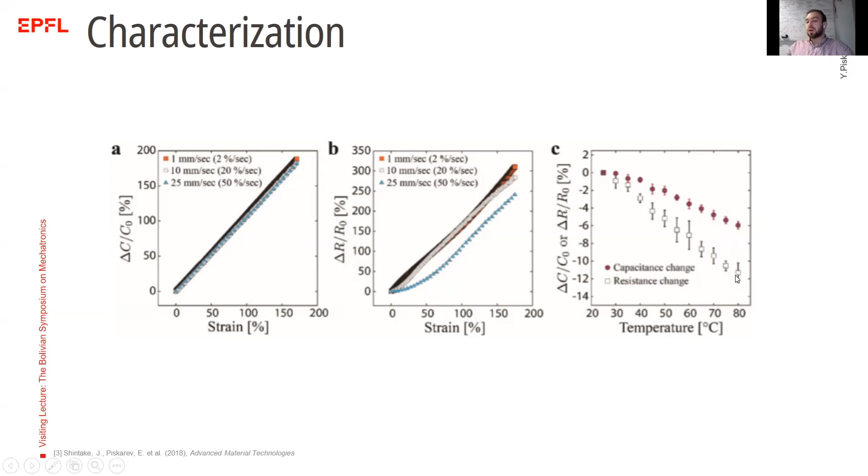And as you see here, what is interesting is that we have some kind of hysteresis in the resistance measurement and almost no hysteresis in the capacitance change. So that was already an advantage of capacitance measurement. Then if you take a look at the strains under different times, you will see the response of the capacitance measurement approach is faster than the resistance approach. And also, if you take a look at the change in resistance and capacitance under different temperatures, it's much less in the capacitance change compared to the resistance change under different temperatures.

And then in the end, finally, we built an example of an application - that's a smart glove, actually right here. You can see it in my office still, for 4 years. That's a smart glove where we can bend our fingers, and when we bend our fingers, the signal is changing, the capacitance is changing. This glove can be used, for example, to control a drone or for any other purposes.

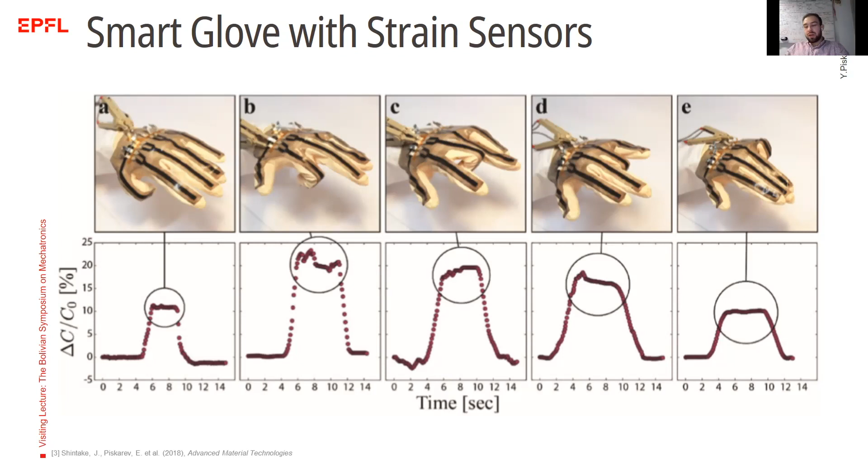Okay, so yeah, I think I will just skip it. And in the end, what I would like to tell you guys, I would like to tell a little bit about the work in the research and development sector, what I'm currently working on.

Quite a lot of people I met think that we are people from research, a little bit weird guys who don't really care about salaries, etc. And I met these people not only in Russia but also in the US.

There is this guy, his name is Doc Brown, probably you saw him, he seems to be a little bit psycho, right? But honestly, I would say that's not absolutely the case nowadays. Why is it not that? In my opinion, probably because people in academia are also evolving, as well as their view on what's going on.

Quite often, actually, people in academia that are doing academic projects, PhDs, just use it as the first step for their future ultimate goals.